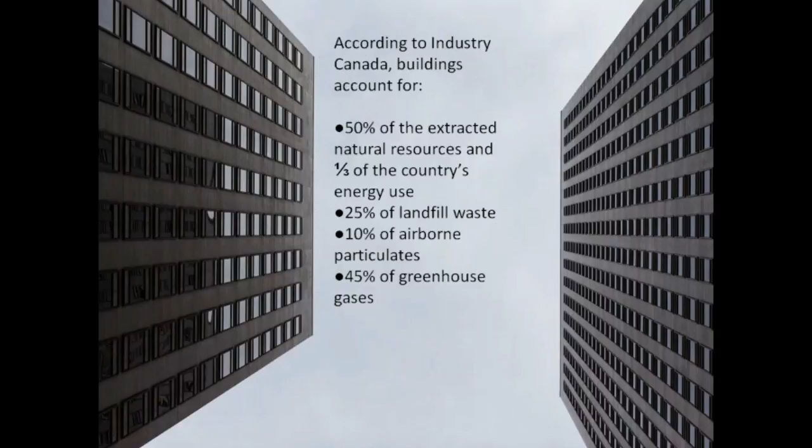These numbers are actually even worse. These are Industry Canada's numbers. I checked them the other day, so these are the most recent numbers on the Industry Canada website. 50% of extracted natural resources, 1/3 of the country's energy use, 25% of landfill waste, 10% airborne particulate, and 45% of greenhouse gases. So that's one of the major motivators, at least from our perspective: how can we build and renovate buildings in a way that better promotes a sustainable future.

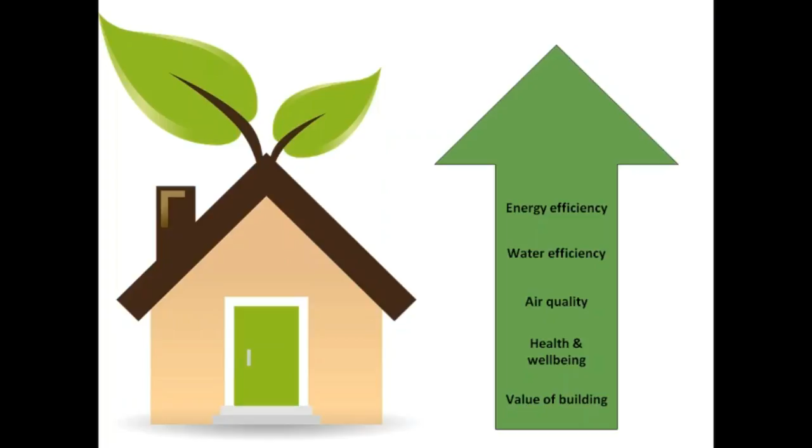And then very quickly, here are the things that can happen in a green building. Your energy efficiency can go up, your water efficiency goes up, your air quality can go up, your health and well-being can go up, and of course the value of the building can go up, which is important to a lot of folks who are trying to resell or developers. And then what goes down? Your energy costs, your operating costs, your building depreciation rate.

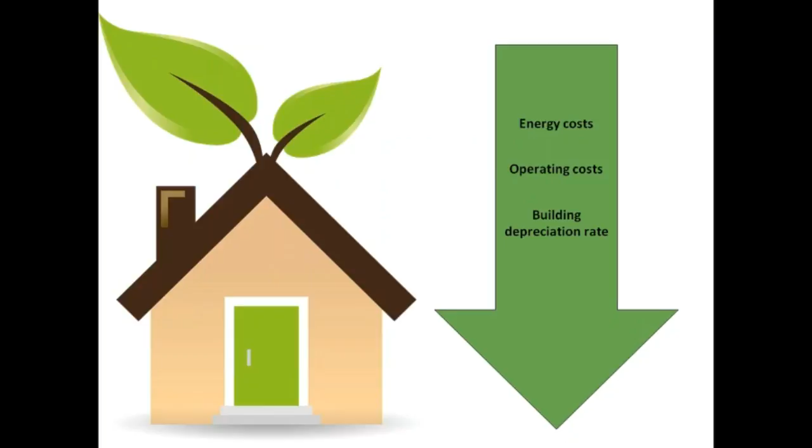In fact, there was just a study the other day, came out of Harvard University, looking at green buildings, and they had various definitions of that, and low-income people that lived in them. They were studying asthma, and the rate of asthma attacks went down significantly in what was deemed green buildings.

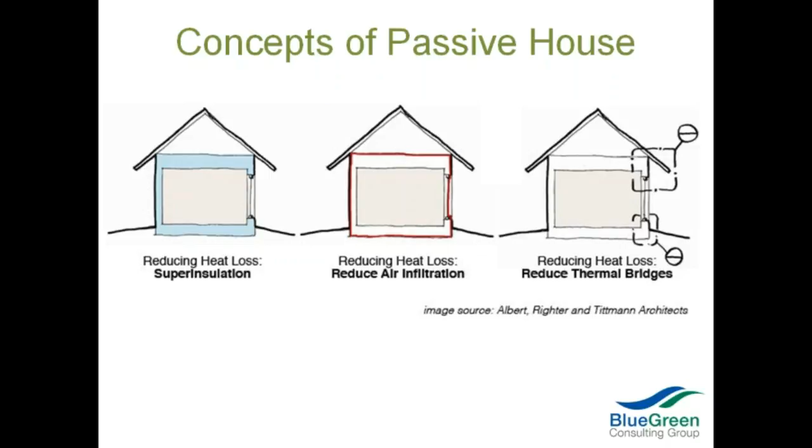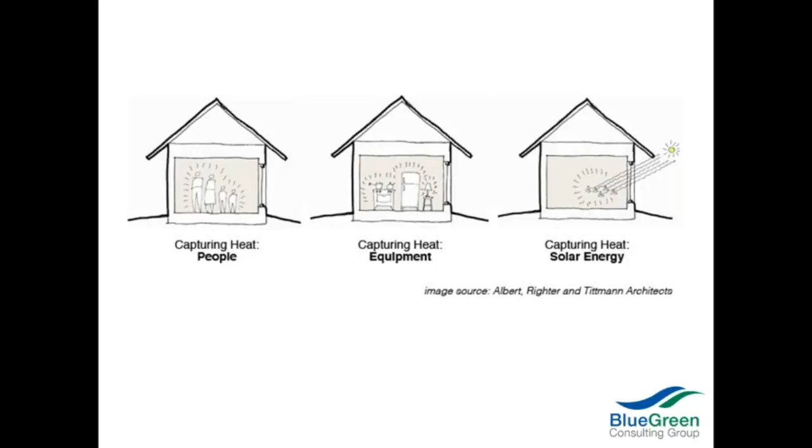The next thing that the concept of passive house teaches is that we capture in that building envelope the heat of the occupants inside. We also capture the heat of the fridge, the stove, all that heat stays inside the house during the wintertime. And of course, we harvest the sun's energy strategically by having calculated, this is what architects are fantastic at, the position of an overhang so that you maximize south-facing solar heat gain during the winter and minimize it during the summer.

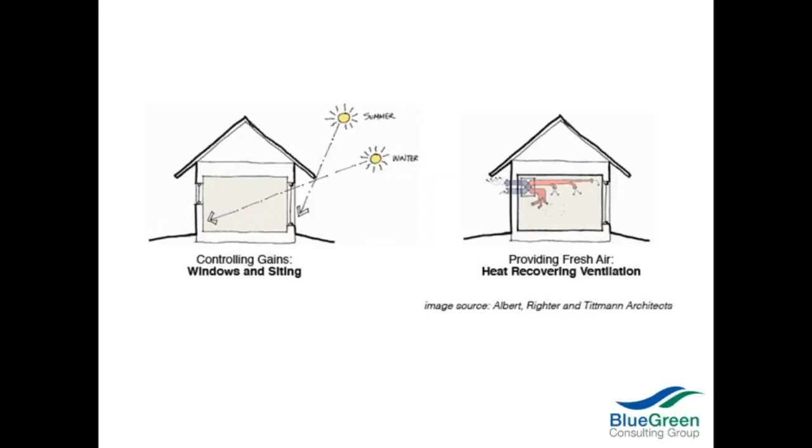And finally, the big key here in all super efficient houses is having an outstanding ventilation system. And these are the lungs of the house, as a lot of people call them.

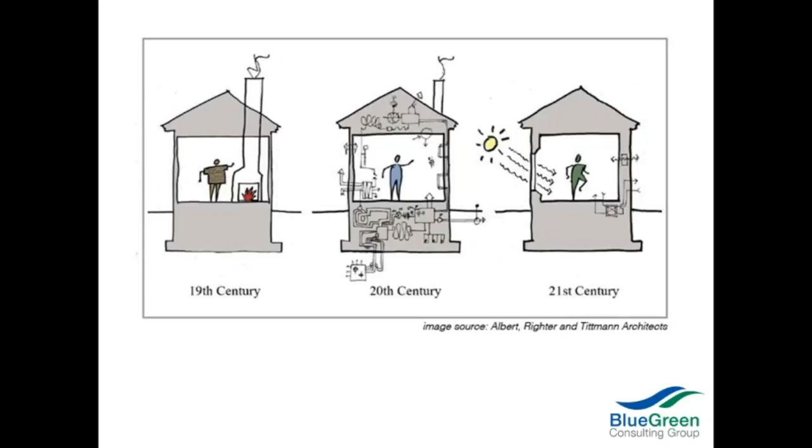So the story goes like this. In the 19th century, we lived in houses with skinny walls. Well, not necessarily skinny, but skinny in terms of R-value. You wore a big sweater, you made a big fire, you had a big chimney. In the middle here is the technological hubris of the 20th century, where my man in the middle has no sweater on, but you need a PhD in mechanical engineering to operate this house. Whereas on the end, the 21st century belongs to small systems, super well-assembled building envelope.

So how does heat move? It moves through conduction, convection, and radiation. And of course, the wind has effects. Wind can push heat in and out of a house, air out of a house if it's not airtight. Same thing with stack effect, the same concept that pushes a balloon up into the sky. So the vectoral forces on the top half of the house are much bigger. So if you've got a tall house, you'll get a lot of stack effect. If your house is airtight, it doesn't matter. There's still stack effect, but there's no air exchange.

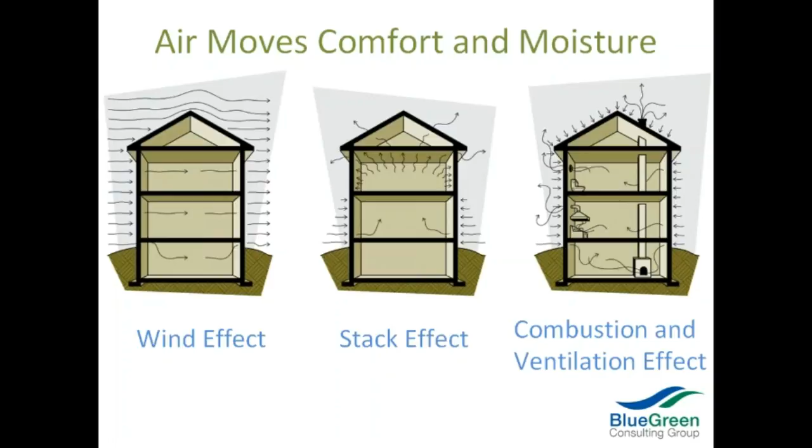And the last is combustion and ventilation. And the whole passive house tends to de-emphasize mechanical equipment so that we don't tip the apple cart on the ventilation systems inside the house.

And a lot of people have this notion that when you stand on the floor of your house, you only lose heat up. There's this whole idea that heat only goes up. But the truth is that we lose heat in all directions, through the floor, through the walls, through air leakage, through the attic, through the windows. So heat moves in all directions. It is true that buoyant air does move up.

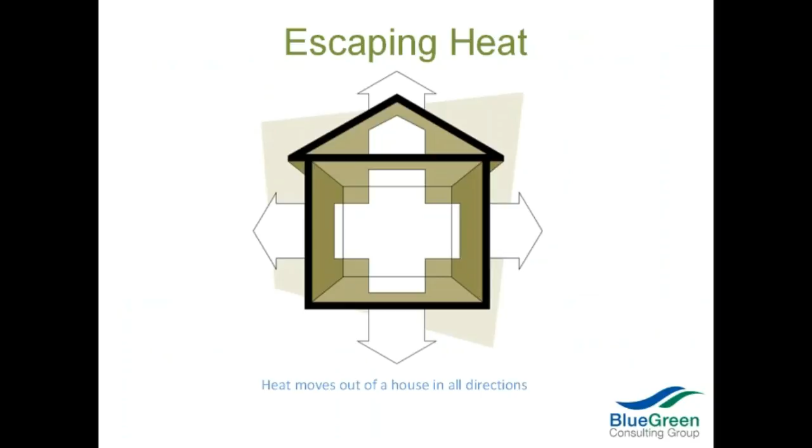So the first of the insights is plan. We like to use computers to do energy simulations so that we can predict what a building's energy consumption is going to be like before it's built. It's a pretty powerful system when you can do that. Simulations take the guesswork out of selecting upgrade features for a house. You can say, well, this feature costs an extra $10,000. What am I going to save? A very accounting, very mathematically based approach to making upgrade decisions.

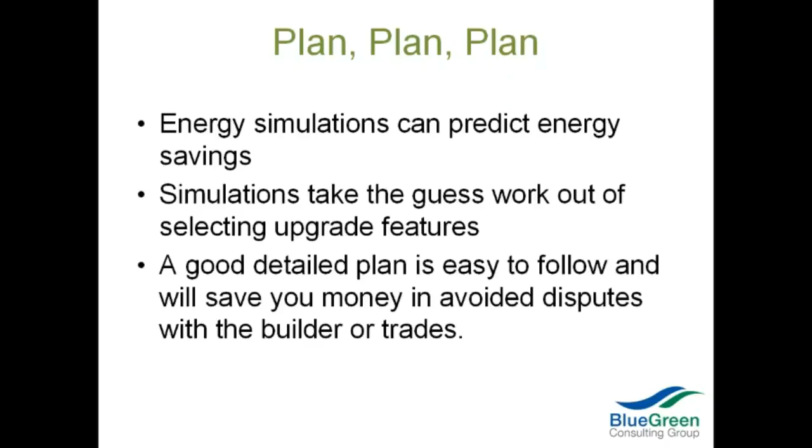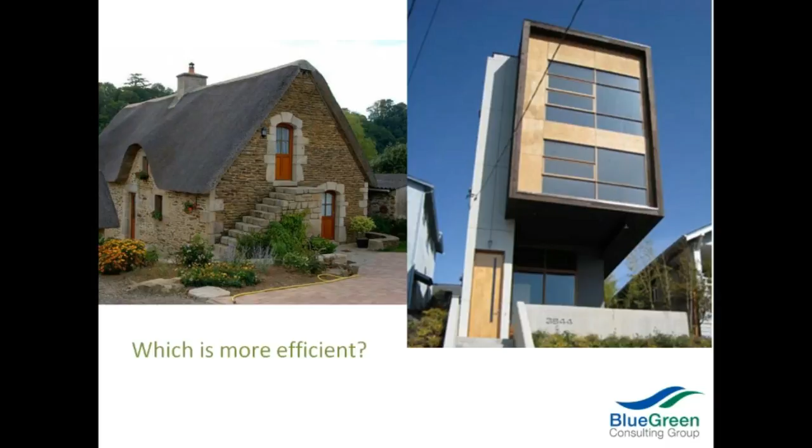So a good detailed plan is easy to follow, will save you money, and it will avoid disputes with the builder or trades in the long term. So plan. So here's an example: which one of these two houses is more efficient? We don't know until we test, until we measure. That's the whole idea with doing energy simulations, we can find out the difference between one building and the next. It could be a 14,000 square foot cottage, which we've done, or a 1,400 square foot house that's perfectly square. So energy simulation is a very powerful tool.

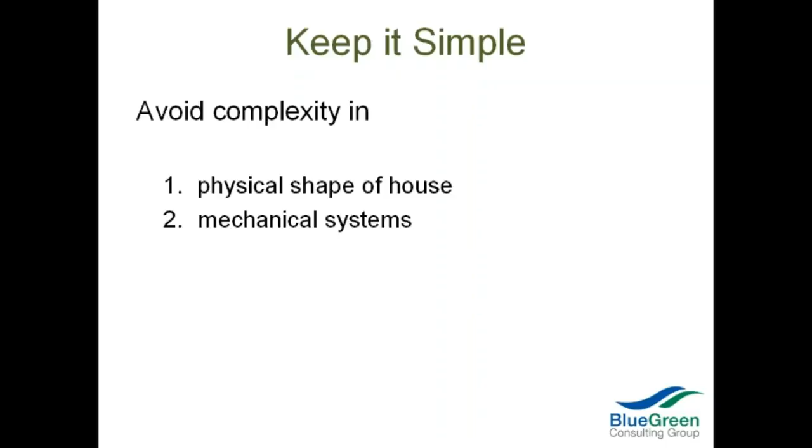Second insight is keeping it simple. Avoid complexity in the physical shape of the building and avoid complexity in the mechanical systems. So we try to de-emphasize complexity, making it simple for people. And it's not to say that building high performance has to be boring. You have to be creative, and we have to build buildings that we love, because if we love the buildings, we'll take care of them, they last longer. That's the truth of it.

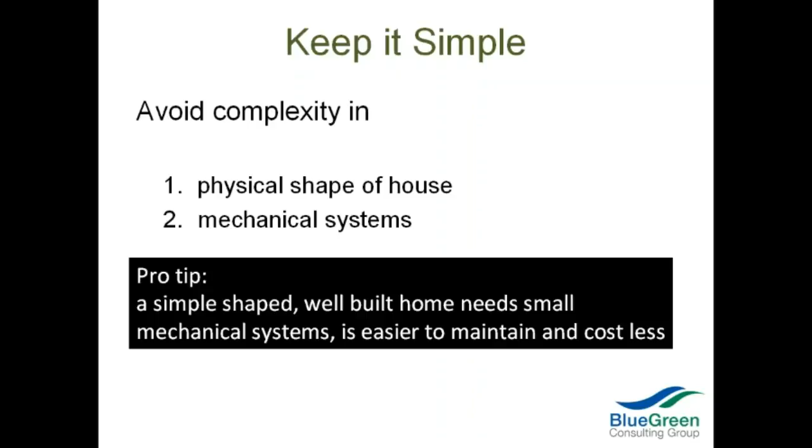So here's a pro tip. A simple shaped, well-built home needs small mechanical systems, and it's easier to maintain and costs less to build. So this whole concept of origami and complexity, the architect Bill Rose wrote me back after I wrote an article in Green Building Advisor. He said, how dare you compare that architecture to origami? You're insulting origami.

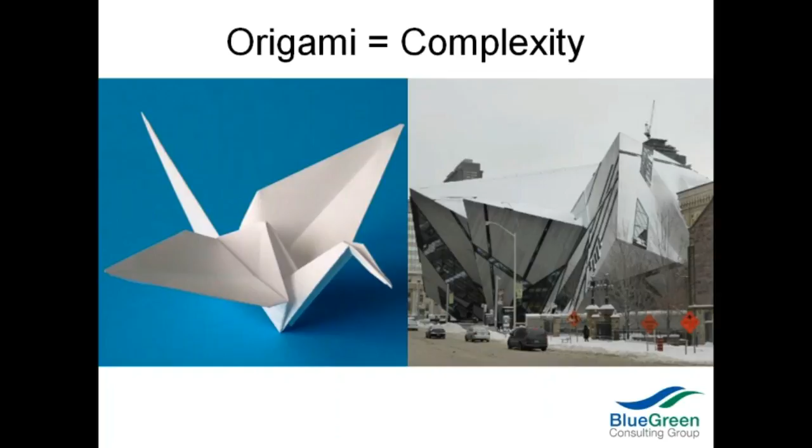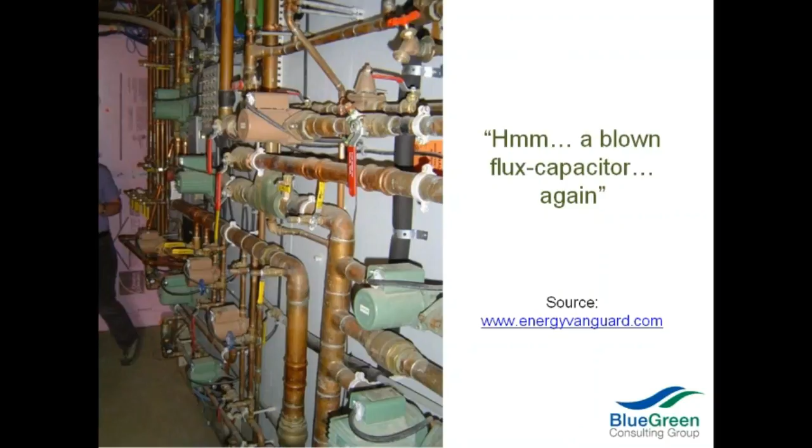I took this from Energy Vanguard's website. I do have pictures as well, but sometimes when you're insulting people, it's good to not insult people that also put bread on the table. So I took Energy Vanguard's advice, or picture, here. But sometimes you need a PhD to operate these houses. Things get really complicated in houses.

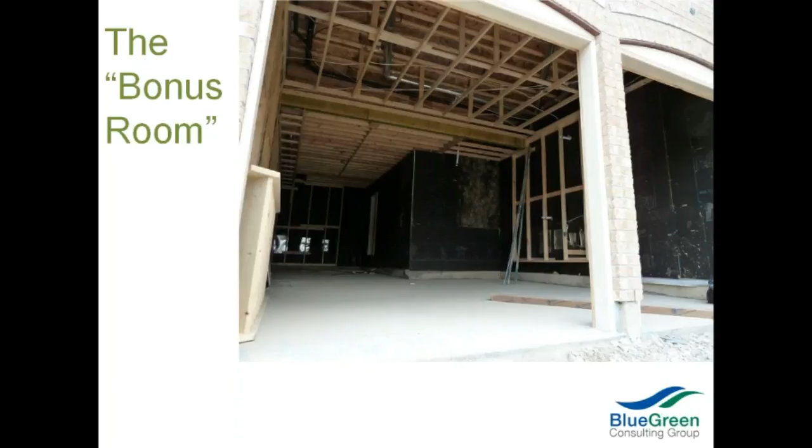Now, it is tough in the suburbs. I understand everyone wants the car, and there's a lifestyle approach. And this is probably not what most people in this room would necessarily opt for in terms of design, but just to sort of lay it out there. So the bonus room, you can design that out with good design.

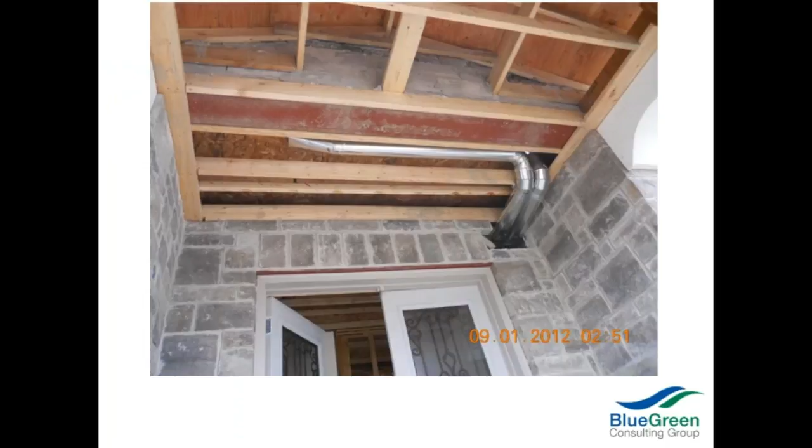And this is what it looks like here, close up. This is, believe it or not, outside the front porch, and this is a bathroom here. You can see a powder-coated steel beam right here holding up the brick above the front porch, and you can see two ducts that come out above the front porch. This is going to be spray foam, but I guarantee you these things are almost going to be bare metal, and they will always be uncomfortable in this bathroom. I believe the crapper was right here, and I've got a crapper story for you coming up.

In 1999, I was hired at Greensaver to go and fix Toronto community housing houses. And my job was to get into crawl spaces and attics. I'm a farm boy, and I was working fine in chemistry, making good money in a lab wearing a white coat. And then I decided to have a career change. I had an epiphany. So here I was, from a white, pristine lab coat, where the glassware was all ultra clean, to crawl spaces that had dead things in them. I learned a lot. But what I can tell you as a past insulator is that somebody has to insulate this attic, and I guarantee you that it will be done very poorly.

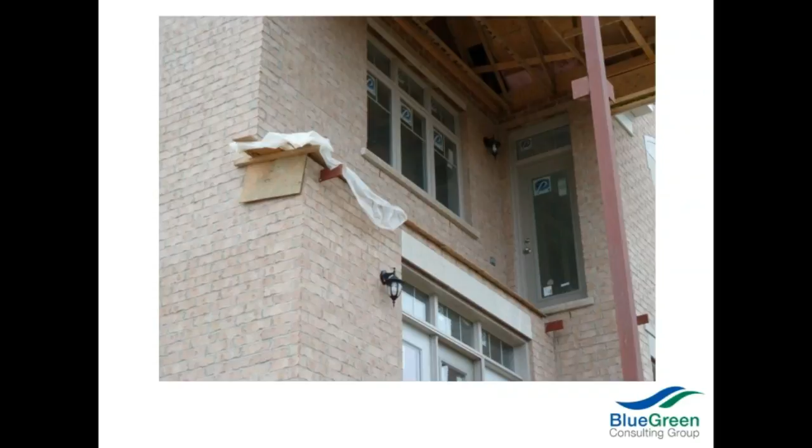So these details here. If we follow this corner, the brick comes down, and then it doesn't align. The corner jogged out. Why did it jog out? Because right here there's a small attic. There's also a steel beam that goes across here. It's a very compromised detail. It's hard to detail and get a good airtight and thermal bridge free assembly. So architects who are aware avoid all these details.

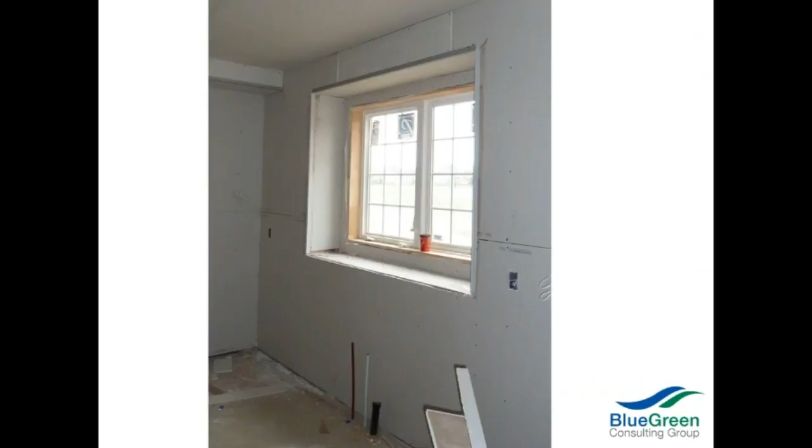The bump out. And I joke here because once the sink is installed here, I can't even reach. I'm too short. If that was my coffee there, I wouldn't even be able to reach it and open the window. So these bump outs, they cost a lot in terms of efficiency.

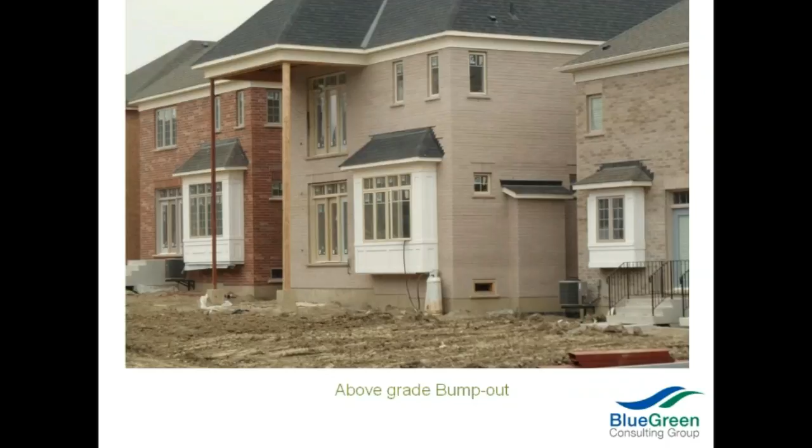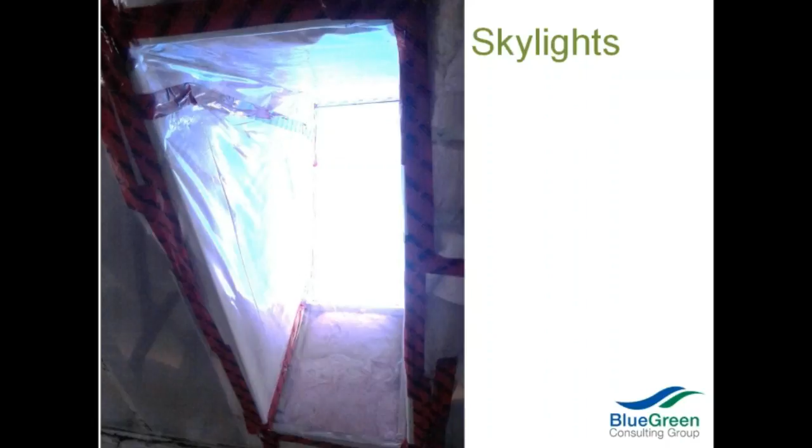Skylights are another one. When mechanical designers design houses, they have to calculate the square footage of wall and the R value of wall. Well, some of these columns can be 17, 20 feet tall and 17, 20 feet long. That's wall area that's never accounted for in the building design heat loss, heat gain. There's always condensation that takes place. Skylights, there's ways to do them properly, but tall columnar is usually not one of them.

This one here, I was there, a pair of French-Canadian guys were installing the drywall. This was 2 feet wide. I always say it's one canoe by one canoe; you could literally fit a canoe up and across. It was 17 by 17, and they were trying to fit the drywall up and nail it to one side in a 2 foot wide triangle. It's crazy. This goes on today in construction sites all around Toronto.

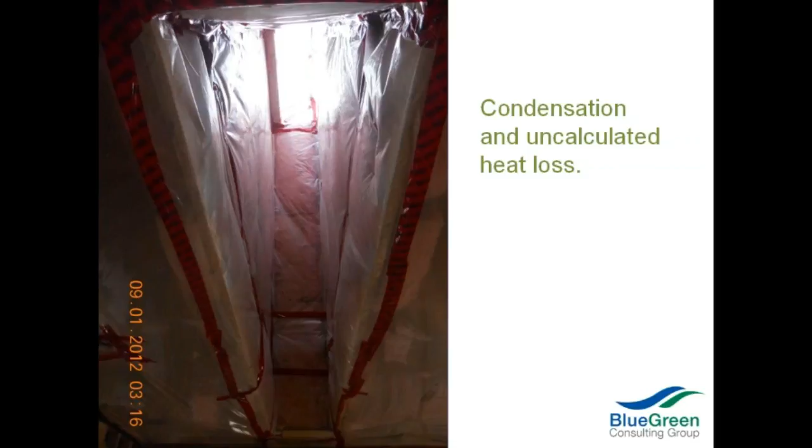Columns. So the bigger your house is, the more point loads you have around the perimeter, the more thermal bridging. Again, this chimney here, one would think, well, what kind of fuel are we burning here? Any guesses?

Someone else. Come on, someone say wood, because you need a chimney. Well, thank you, Matt. Thanks, but you're wrong, Matt. Oh, jeez, it's natural gas. Oh my gosh, how can we tell? Well, it's got a little vent right here, right? Is that it? Yeah, it's right in that area. I can't tell from this angle here.

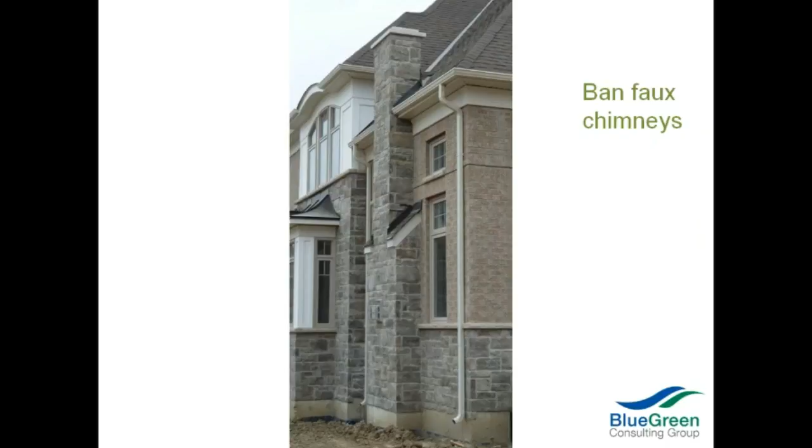So this is a feature that somebody paid a couple thousand dollars for. Like they interrupted the eave here, and they had to jog out the wall. That's a lot of expense for something that is just, it's like this jacket. It's just a fashion statement.

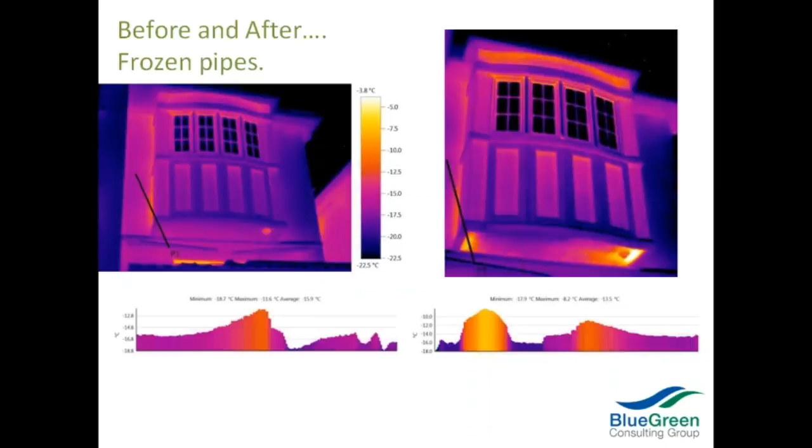So these two hot spots are me forcing the warm air outside of the building here, causing a peak here and a peak here that weren't there. So what we see here is under natural conditions, if the wind is blowing in the right direction, the air gets in here and it overwhelms the water line and freezes the water line. So all of this stuff can be designed out. And that's what we're saying, design it out by good plan.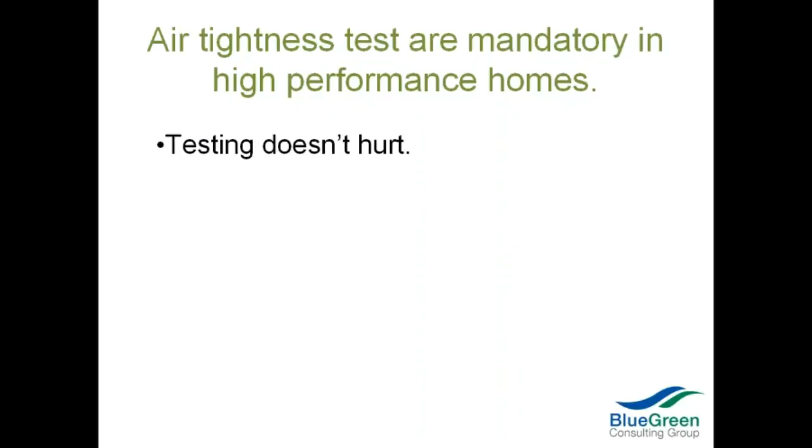So the third point that I want to make is test, don't guess. If you're not testing, you're guessing, really. I know, it's a cheesy sort of self-promotion. Airtightness tests are mandatory in high-performance homes. And I always tell people that the testing just doesn't hurt. It's safe. Homeowners like the added scrutiny, especially pre-drywall.

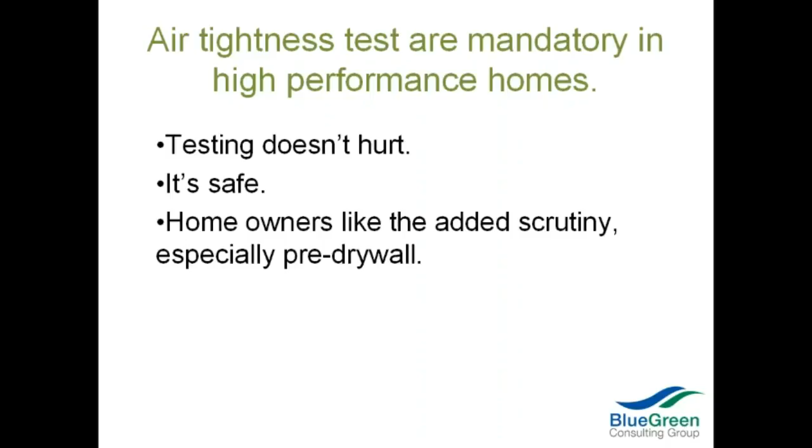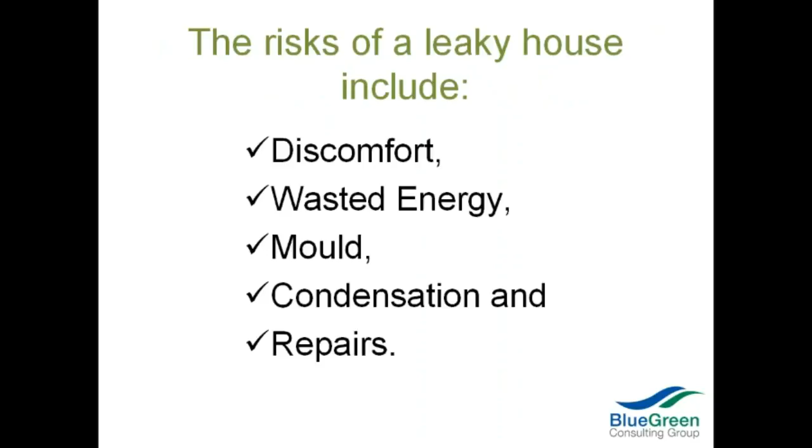We like to do pre-drywall tests because when the drywall is not on, you can fix things. Once the drywall is on, it's too late. You can't change anything. Well, you can, but you have to rip it down. And then there's the benefits of an airtight home. So what are the benefits? There's durability, comfort, energy savings, and health. And what are the risks? The risks are discomfort, wasted energy, mold, condensation, and repairs.

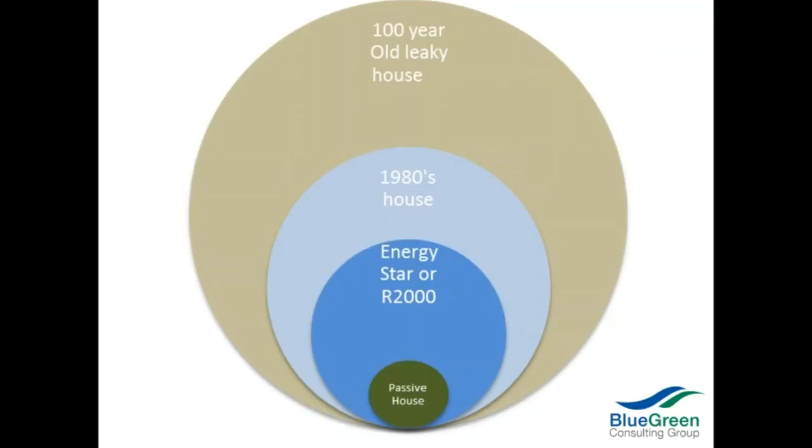We don't want that. So my house, which is an old house in the Junction area of Toronto, is like this. It leaks a lot. In the 1980s, we started making houses a little bit more airtight, but not necessarily on purpose. And then Energy Star and R2000, they're starting to get more airtight. And then the Passive House. So this is all the heat loss due to air leakage. And you can see Passive House is singularly focused on making buildings super airtight. You test your shoes, why not your house?

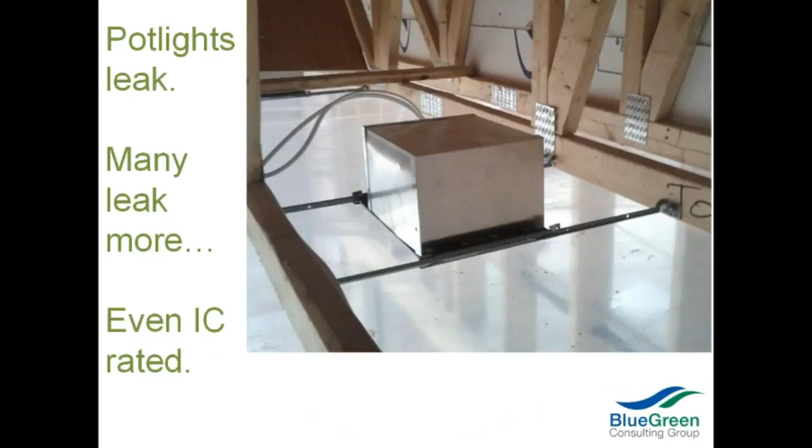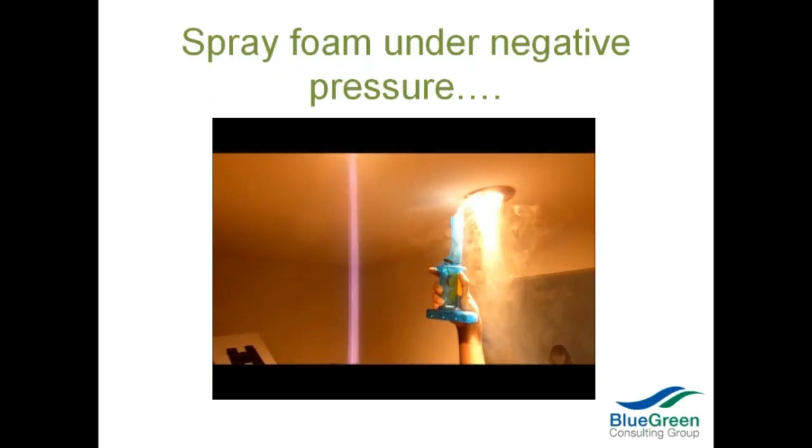Try before you buy. Pot lights. So this is a pot light before the drywall is installed, from the attic side. And this is what it looks like in my neighbor's house, which is just really sad. Oh, it's a video and it's not showing. I'm sorry about that. Anyways, you can see the smoke just pouring in. I'm depressurizing the house, and there's a lot of air leakage happening. And yeah, it's too bad. All of this stuff can be avoided if you test before the drywall goes on.

Spray foam. A lot of people think it's the silver bullet, that it's going to be the one thing that's going to solve all of their problems. But you have to test it. You have to actually physically inspect it, make sure that the spray foam got everywhere and is adhered to everything and is continuous.

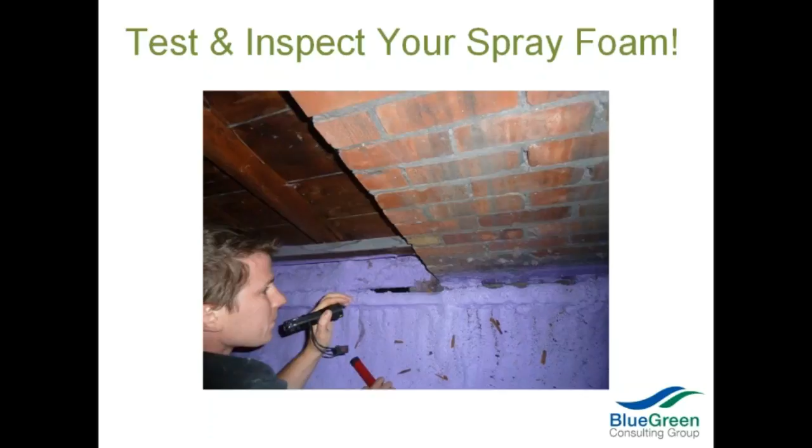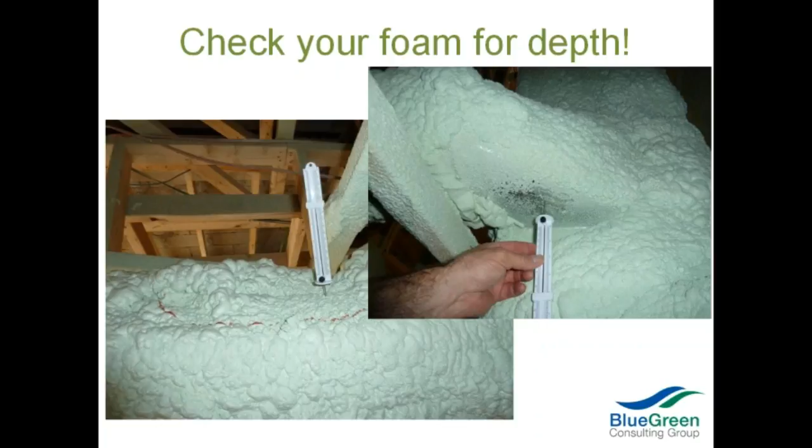In the attic, there was a lot of ductwork, and I had to have the spray foam contractor come back 4 times to apply foam to missed spots. I kept on going up there with a magic marker: come on back, do this section, do this section. So again, spray foam, is it really air sealed?

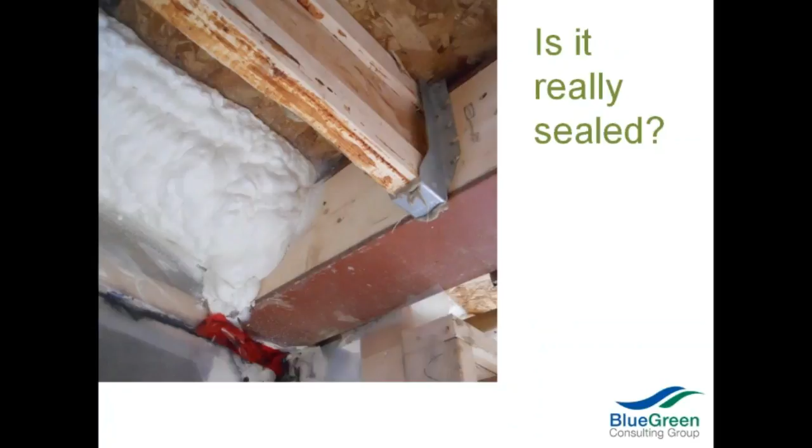We can look at the nice fluffy stuff here. This is a beam. There's a lot of stuff that could have been changed here in terms of the design. So plan. And again, here you can see right here that the foam is delaminating. And this is common with a half-pound foam if it's not applied properly. Half-pound foam really moves quite a bit.

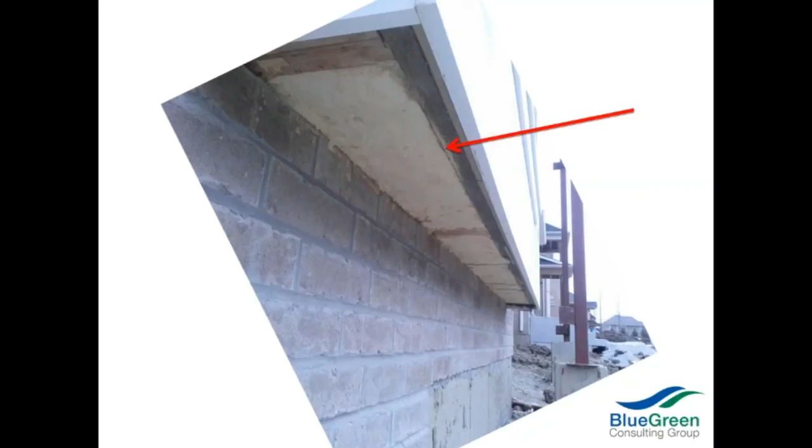Finally, the last point that I want to talk about is, let's clear the air. Let's put a price on distributed fresh air. And what I say about that is it's very important as houses move to become more airtight, that we actually invest in good mechanical ventilation systems.

So efficient homes need to be airtight. Exhaust-only ventilation sucks, warns Dr. Joe Lstiburek. I don't know if you know Joe Lstiburek, U of T graduate, engineer, bigwig building scientist down in Massachusetts. Writes a lot of interesting papers as part of Building Science Corp.

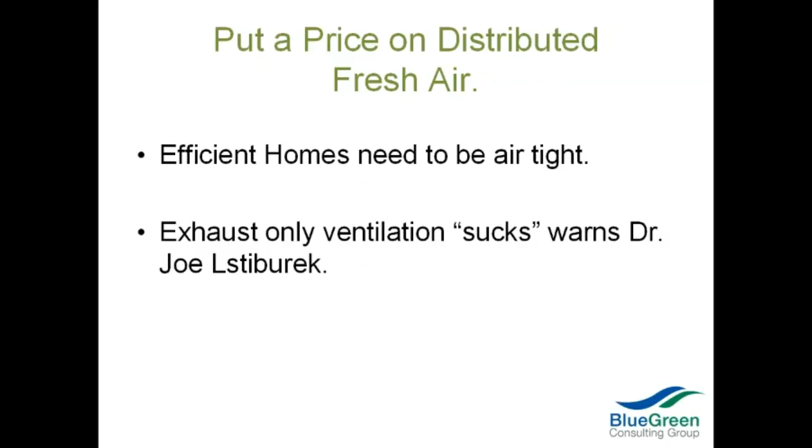Houses don't need to breathe, but the occupants do. And that's something that everyone needs to pay attention to. Ventilation is not something you let the building shell take care of through leakage or having a window open. Ventilation needs to be dosed precisely. And I always tell architects that, especially, think of a dose.

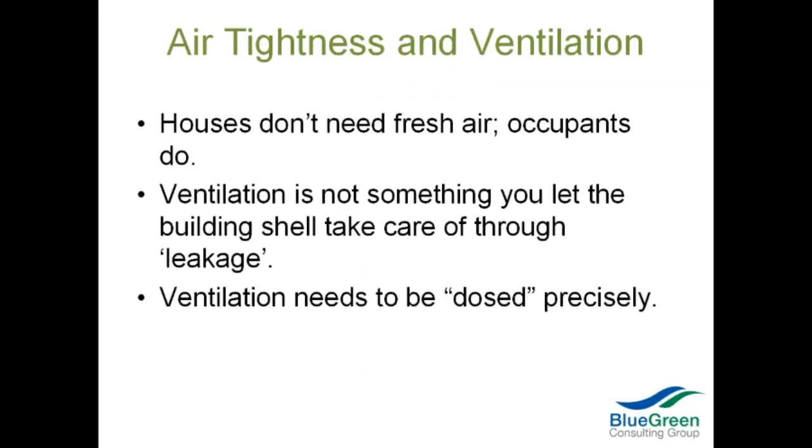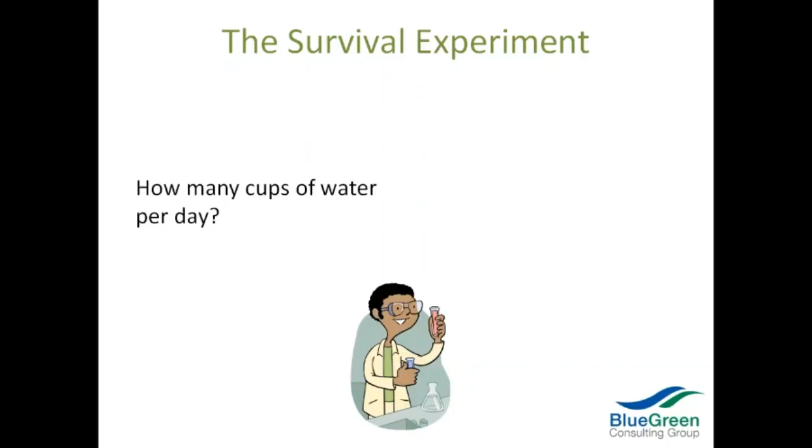It's just like if I ask you, how many cups of water a day do you need to stay alive? And I ask you guys, I want somebody to throw me, not Ed, because you know the answer. How many cups of water? 8 cups. Okay, so how many cubic feet per minute per occupant of fresh air do you need in order for the air in your house not to be stinky?

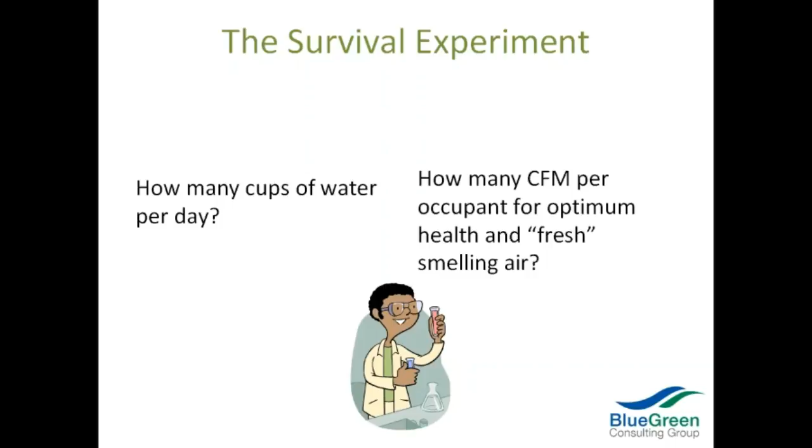They've engineered this through smell tests. Hockey bags. Just give me a number. Cubic feet per minute, that's like imagine a squared off basketball. 10, did you say 10? Oh my gosh, you must be a building scientist. Yeah, I think you're right, it's 10.

So we're going to do a quick experiment. We're going to take half the room. If you guys could just, for a couple of minutes, stop drinking water, okay? On this side, it's going to be messy. You guys just stop breathing air, okay? We're just going to do this for 3 minutes, starting now. How are you guys doing?

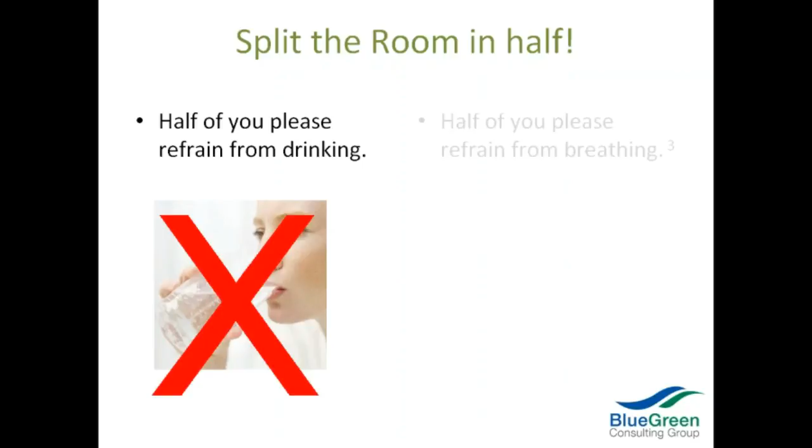Okay, so we realize that we can live a long time without fresh water, but we can't live long without air, without oxygen specifically, and it's a bonus to have fresh air. I just learned yesterday, I was watching a National Geographic video on YouTube about submarines, and specifically about a US-made submarine, the biggest nuclear submarine in the world, and they were talking about making air underwater.

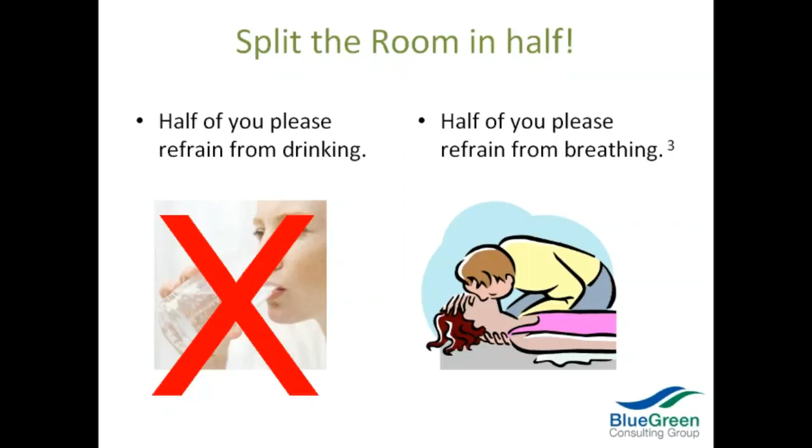Because I always wondered, how long would it take me to deplete the oxygen in a certain amount of air in a day? And the National Geographic show gave me the answer. It was 12 cubic meters of air for one human to deplete all of the oxygen within that air. Now that's not fresh air. That's 12 cubic meters of air for one person just to survive basic functioning on the ground, just breathing. So that's not enjoying your life, and that's not working out on a treadmill in the basement.

So the results of our experiment showed that it's more crucial to have fresh air than it is to have good water. Yet, as North Americans, we've all seen it. You go to the grocery store and there's people pushing shopping carts full of water in bottles, when we have a tap that gives us municipally safe, brilliant drinking water, except in certain communities, which is a sad state of affairs.

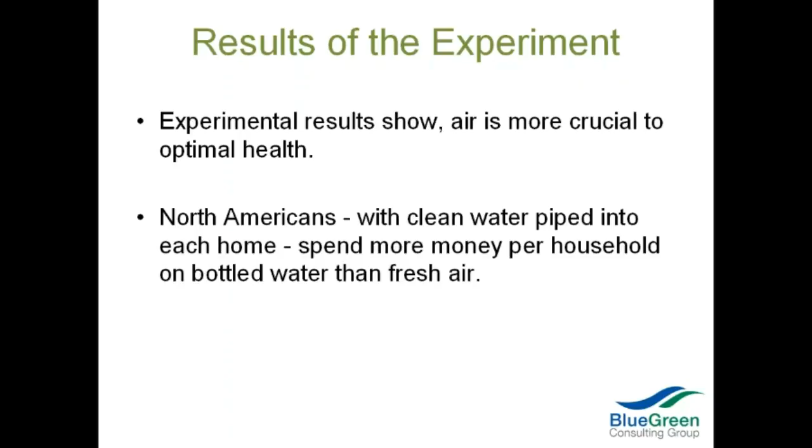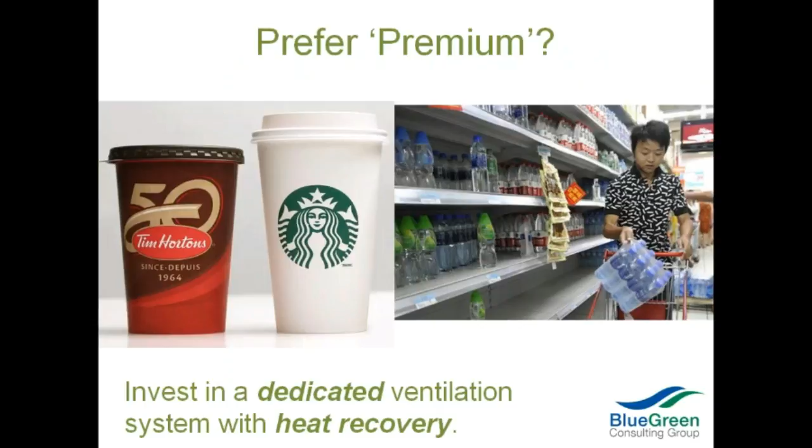But yeah, so put a price on fresh air. So if you pay the premium, think about ventilation. Invest in a dedicated ventilation system that has heat recovery. So those are all my points. When you go about doing a renovation or building a new house, ask yourself, where do you stand on comfort, health, and energy efficiency? Are you the kind of person that likes excellence? Do you like good, average, or are you okay with poor?